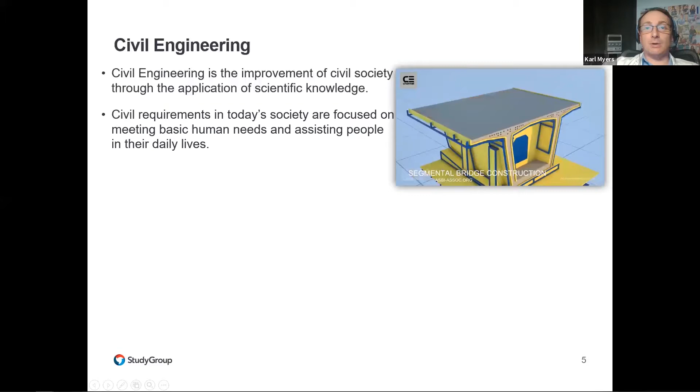As a civil engineer, you will focus on the improvements of civil society. For example, building new roads to connect remote villages, building new hospitals, railways, and bridges. The list of what a civil engineer does is truly endless. Essentially, civil engineers are focused on meeting basic human needs and assisting people in their daily lives. To do this, they need to understand the environment and how they can use it safely and intelligently to improve the population's quality of life.

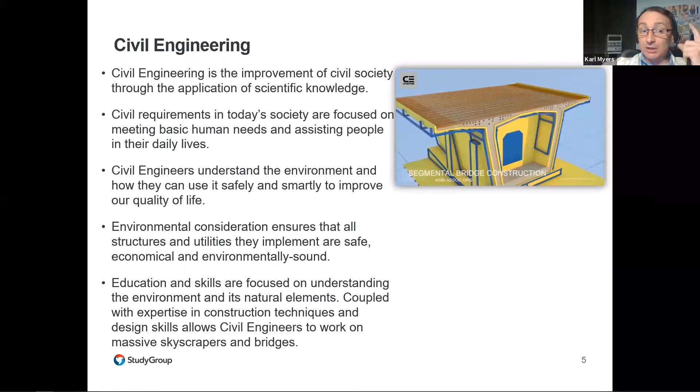Thus ensuring that all structures and utilities that they implement are safe, economical, and environmentally sound. As a civil engineer, you will be taught the skills focused on understanding the environment and natural elements, coupled with expertise in construction techniques and design skills. This allows civil engineers to work on massive skyscrapers, such as the huge civil engineering projects in Dubai.

So why should you choose to study civil engineering as an engineering discipline?

Employability. The world today is rapidly expanding, and with new initiatives in living and creating a more sustainable, environmentally friendly environment, civil engineering is experiencing a massive boom. Due to this, many countries are showing a skills shortage in civil engineering, and in many cases, all engineering disciplines.

So what do I mean by skills shortage? Essentially, there are not enough civil engineers for the jobs available. This means you have an excellent chance of finding a job in civil engineering right out of university, and in some cases, before you even leave university. This is the main reason why civil engineers enjoy one of the lowest unemployment rates of any profession, and civil engineering is one of the top paid professions.

This may not be your main reason to choose civil engineering. However, the main reason for working is to earn money to live. Starting salaries for civil engineers are amongst the highest for any university degree. It's the same with any engineering discipline, to be honest. It is one of the highest paid professions, being an engineer. In fact, the starting salary for a civil engineer, for example, is up to £29,000.

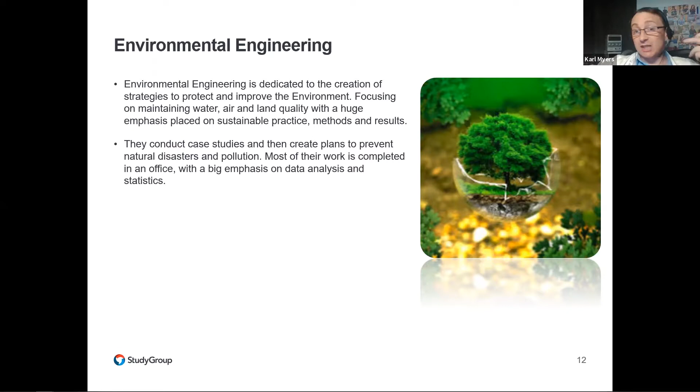They conduct case studies and then create plans to prevent natural disasters such as flooding or drought and pollution. Most of their work is completed in an office with a big emphasis on data analysis and statistics. In that regard, they're using a lot of artificial intelligence systems, mainly machine learning, for statistical analysis and predicting future trends, for flooding or drought, and also pollution.

Unlike other civil engineering disciplines, environmental engineers rarely use design and simulation software, which we'll be using today, but instead rely on data, statistics, and ethics to guide them. Due to the complex environmental laws that govern their every move, graduates of this discipline tend to have a better understanding of ethics and social problems than other civil engineering disciplines.

Environmental... sorry, I can't get my words out.

Environmental engineers are hugely in demand for government projects and by parks departments to implement strategies to deal with pollution, waste management, and noise levels, amongst many others. Some private companies also utilize the expertise of environmental engineers in their activities, if their activities have a potential adverse effect on the natural environment.

Consultancy work is another possibility, with many research positions opening up across universities and private companies as they ramp up their efforts to combat climate change. Environmental engineers implement strategies to deal with these problems, essentially.

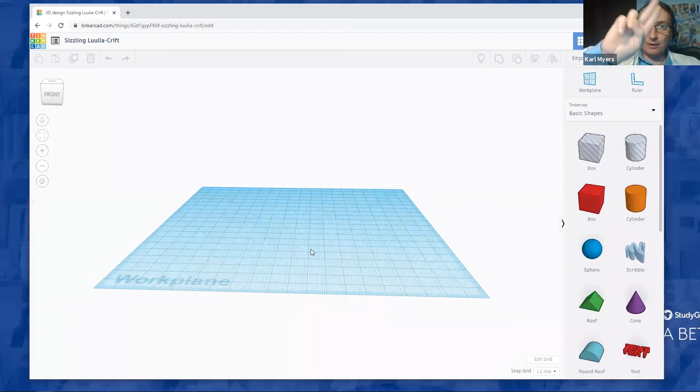If you're using a laptop trackpad, use your 2-finger gesture on the trackpad. Open your fingers to zoom in and close your fingers to zoom out. To move around the workspace, right click and hold, then move the mouse any way you'd like, and that will move you around the workspace. If using a laptop trackpad, right click on the trackpad, hold, and move around to move the work plane around.

Another way, which I will actually be asking you to do, is something called snap. If I ask you to snap front, you will see a little cube in the top left-hand corner. If I say snap front, just click on the front and it will snap to the front. If I say snap top, use the arrows on the side of the cube, and that will snap you to the left, right, top and bottom. We'll start from the top, just like that. Is everyone okay with that?

Professor, some students are asking for a code.

Okay, let me just log out. What you've tried to do, you've tried to actually access a class. We've not actually created a class in this, because I'd need to email everyone the class number. So let me just log out and I'll show you where to sign in. Just one second, I will log in now.

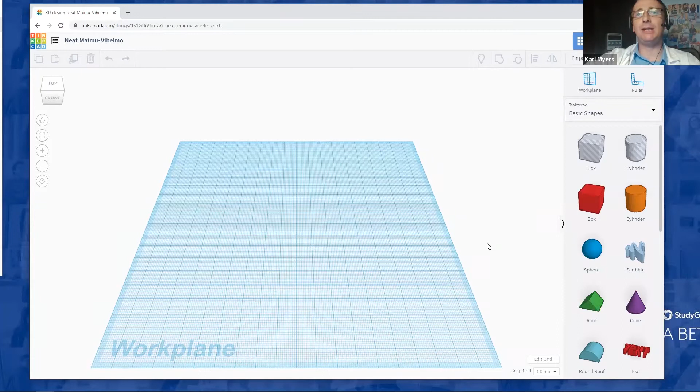You'll be faced with the design workspace, or 3D design work plane. To navigate this work plane, to zoom in using a mouse, scroll forward with your mouse wheel to zoom in, backwards to zoom out. To travel around the work plane itself, right click on your mouse, right click and hold, then move the mouse around to navigate around the work plane, just like that. You can also do this using the trackpad on your laptop.

So to zoom in, just open your fingers. To zoom out, close your fingers.

Another way of navigating the workspace: you will see a cube in the top left-hand corner. If I say snap front, just click the front of that cube and you will snap to the front of the design. If I say snap top, click the triangle at the top, or click on top, and that will snap you to the top. The same for all the others: left, right, and bottom.

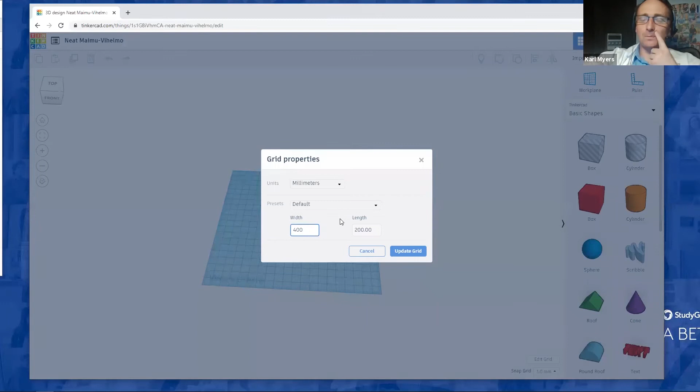Right, so the first thing we're going to do is set the scene. In the bottom right-hand corner of the work plane or design workspace, click edit grid. Then I would like you to change the width of the work plane to 400 millimeters, and also change the length to 40 millimeters, just like that. Then just click Update Grid, and you should be faced with the design or work plane just like what's on my screen now.

Another thing I would like you to do - you'll see just underneath Edit Grid, it's called Snap Grid. I would like you to change that to 0.1 millimeters, please. There you go, just like that.

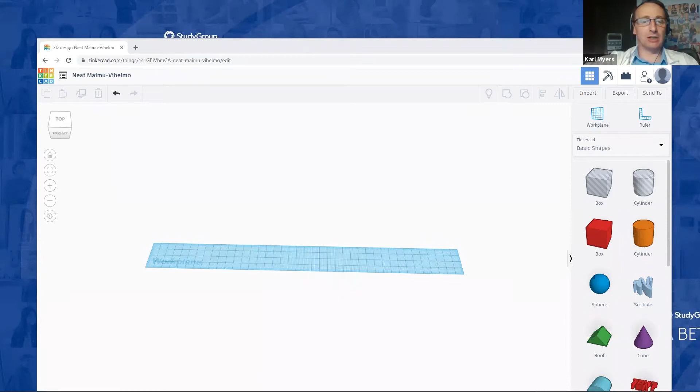Again, we'll take this nice and slow because it's really, really tricky, just to get it. You will see - I won't explain it now because you may not understand, but you will see.

Yes professor, I have some yeses here, so I think you can go forward. Let's do it. Okay, so the first thing that we're going to do, we're going to set the scene.

We're going to add the banks of the river. On the right hand side, you will notice that when we're actually building something using Tinkercad, all that we use is basically basic shapes - boxes, cylinders, spheres, and prisms, and so on and so forth. This is the same as another piece of software brought by Autodesk called Autodesk Inventor.

Essentially with Inventor, you can actually just build things out of shapes. So you will see in the shape or component search bar on the right hand side, you will see the box, the red box. If you just click on that and drag one over to the left hand side of your work plane...

And you will see, I'll zoom in for you. Let me just spin that around so you can see it. Let me zoom out so you can see it. You will see when you create that block, white squares all the way around it.

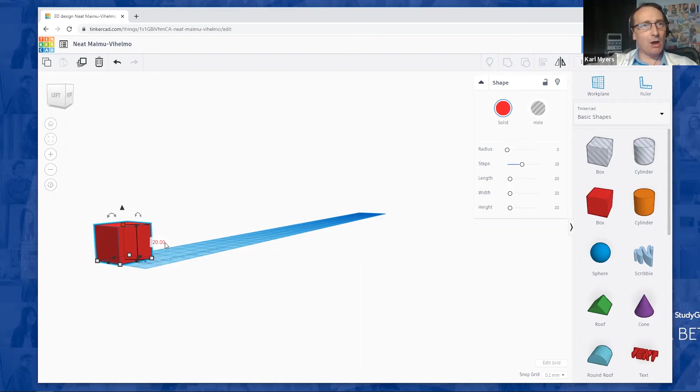With these white squares, you're able to click on the white square and then change the dimensions or sizes of the block. So the first thing we're going to do is change the height of the block, to 30 millimeters. If you click the top white box, you will change that to 30 millimeters. This is because the bridge is going to be suspended 3 meters above the river.

The next thing you're going to do is change the width of the block, to 40 millimeters, just like that. And then the length of the block is going to be 50 millimeters, just like that.

Once you've done that, move around the work plane and make sure the box is actually on the work plane, because if you don't create it just like that, looking from that orientation it looks like the box is on the work plane, but if you look from underneath, you can see that it's not. Can I have a show of hands when you've completed that step, please?

Also, if you click on that box, we're going to change the color of that to green, essentially because it's the bank of the river.

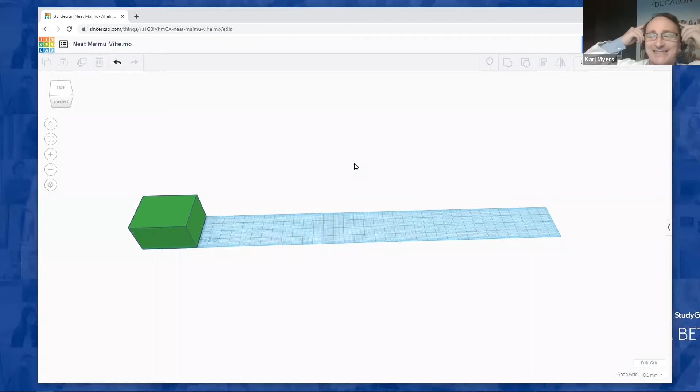Is this from Autodesk, Professor? Yeah, Tinkercad, Autodesk, it is. You will be very familiar with this. I think the one I'm more familiar with is just the 2D designs, and then we extrude them to make it 3D, so it took me a while to get used to the 3D software again, since it can be really fiddly. I don't know how to use ArchiCAD, it's so annoying, I prefer Revit. That's the problem with this software, brought by Autodesk - it can be quite fiddly. But it's really handy, for example for simulating - you can't simulate in this software, but you can using Inventor. You can pull out hotspots, areas where there's going to be the majority of damage. So it's a really good bit of kit, actually.

It's a challenge. Professor, can you repeat the step to change the block color, please? Of course. Click on the block itself, and in the right-hand corner the shape options will be displayed. Click off the block, click on it again, then click on solid where it says solid, and change the color to green.

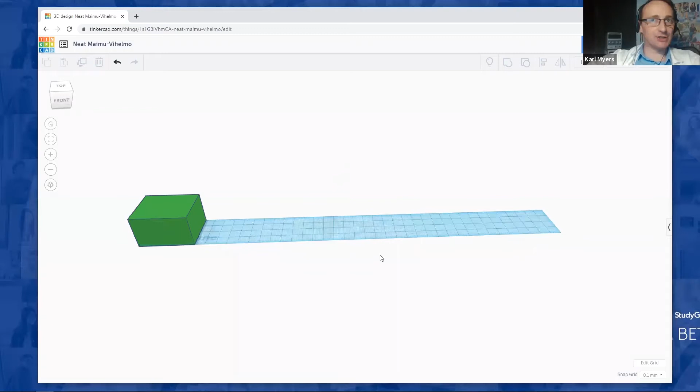I'll show you a little trick now. When using software like this, you don't have to keep creating the same thing - you can use something called duplicate. Essentially it just copies it and you drag it to wherever you need it. I'll show you that now. This will become evident why it's useful when we start creating the trusses for the bridge.

I think we can go, Professor. Let's do it, let's go. The next step, you've created the left-hand bank of the river, so now we're going to create the right-hand side. Snap top, just like that, then click on the block itself, the bank you've already created. Then on the top right-hand corner, let me try and straighten this block up a bit.

Okay, so if you click on the block, in the top left-hand corner next to the garbage bin or dustbin, whatever you want to call it, right next door to that is a button called duplicate and repeat. If we click that, it creates a duplicate of that block inside the previous block.

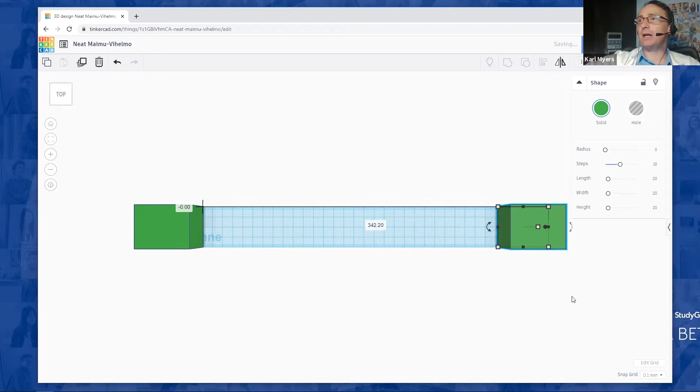So if we just left-click and hold, and then drag the duplicated block to the opposite end of the work plane, just like that. Then move around to make sure that the block is actually at the end of the work plane.

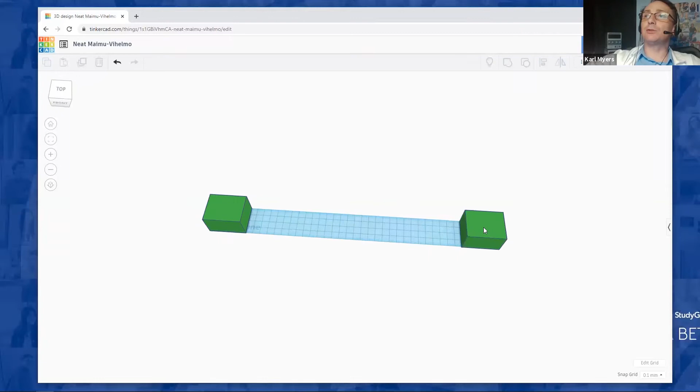So this is another thing as well - sorry, I should have mentioned this earlier. If you make a mistake or you just want to remove a block, or you've duplicated something twice, if you just click on the block itself and then click delete, it will remove the block.

So the last step, if we've just created the left-hand bank, if we click on the left-hand block, just in the top left-hand corner you will see a dustbin or garbage bin, whatever you'd like to call it. Right next door to that, on the left-hand side, you'll see another button called duplicate and repeat. If you click duplicate and repeat, that creates a block inside of the block you duplicated.

So if you just left click and hold on that block, you'll then be able to drag a new block over to the other end, or the opposite end, of the work plane. And again, just swivel around the work plane itself to make sure the block is actually completely on the work plane.

As you can see, mine isn't. So if you just click on it, left click and hold, you can then move that block wherever you need to. And that is the problem you're going to have all the way through this - making sure the blocks are in the right place.

To duplicate blocks, say for instance you've made a square out of blocks, to duplicate that whole block, you've got to make that whole thing a block in itself. And if the blocks aren't touching, it will not group the blocks. But we'll talk about that a little bit further later on.

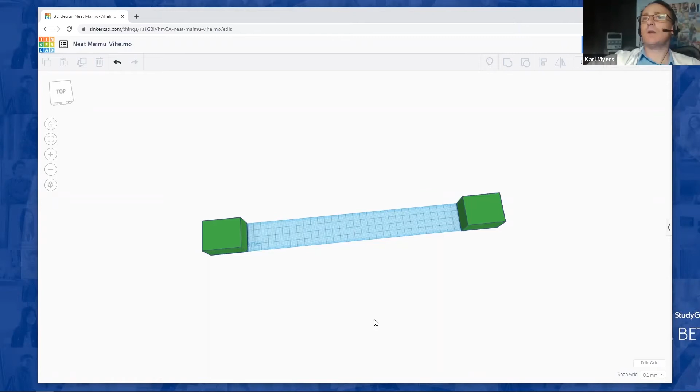Okay, how are we all doing? Everyone okay? Okay, Professor. Brilliant, excellent.

And this is really fiddly at the moment when you're just learning it, but believe me, I will show you at the end what other students have actually created with this. They never stopped with bridges - they've actually designed full cities or a little cityscape within it. So it's really, really good software.

Okay, again, just let me know when you would like to continue.

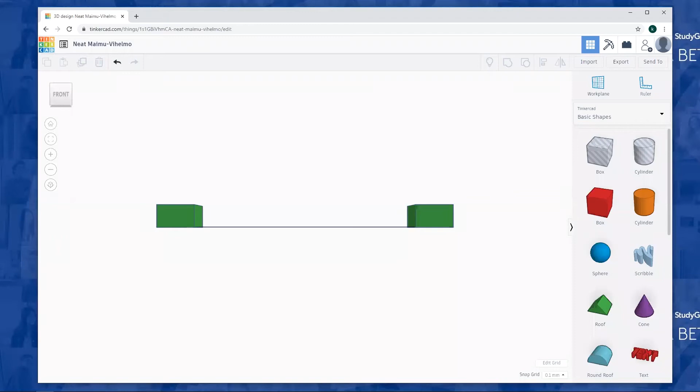Okay, so we've got loads of hands now, loads of hands. Yes, I think we can go.

Yeah, let's do it. Okay, so the next thing that we're going to do is create a new work plane. And what I mean by this is where we've just built the actual riverbanks - so the work plane for that is essentially the river. So we need to create a new work plane on top of the banks of the river, essentially where we're going to build the bridge.

So again, in the component search bar, or the shape search bar if you'd like, you will see just at the top of it where it actually says work plane. It may not say work plane - well, obviously it will say work plane, but it'll be in there in Portuguese, I think.

Okay, I know we had issues with this last time. So if we just click work plane, and then move this over, you'll see a white square following your mouse cursor. Drop that on top of the left-hand bank, and just click to drop it. As you can see, it creates a new work plane on top of the bank. This is where we're going to start building the bridge.

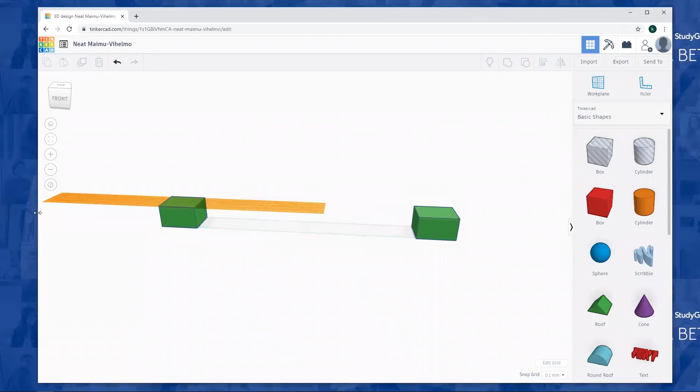Sorry, Professor, when you're ready. No, totally excellent, no problem at all. Just take your time, there's no rush. I would prefer it if you all basically got to finish the bridge rather than rush.

So the next thing we're going to do, just snap front. When I say snap front, click on the cube in the top left-hand corner, and click on front, or whatever it is in Portuguese. I don't speak Portuguese, unfortunately.

Okay, so now we're going to create a vertical strut. Sorry, one second, I've got the wrong PDF. So here we go, I've made a mistake there. Just one second. There we go, okay, so now I'm using the right one.

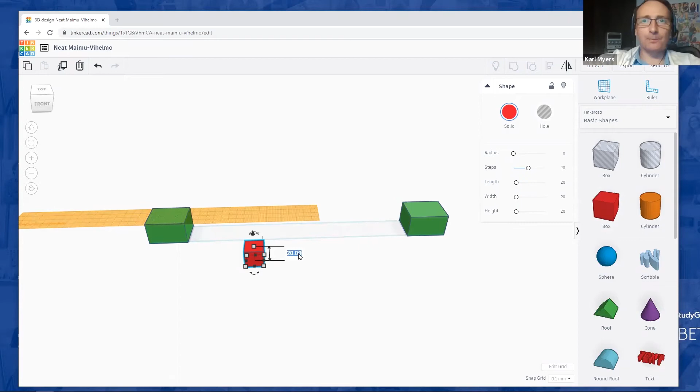So to do this, again we're going to use our friend the block or the box. Click on that, and drag it over to our work plane, just move it away from the work plane, like that. Then we're going to change the dimensions of this block: the height is going to be 1 millimeter, the width is going to be 1 millimeter, and its length is going to be 75 millimeters. If I zoom in on that, it should look something along these lines.

And we're going to leave that color as red, okay? We're going to pretend that the bridge is painted red.

If you would like me to repeat those dimensions: we've got a height of 1 millimeter, a width of 1 millimeter, and a length, excuse me, of 75 millimeters. Again, just let me know when you're ready to continue.

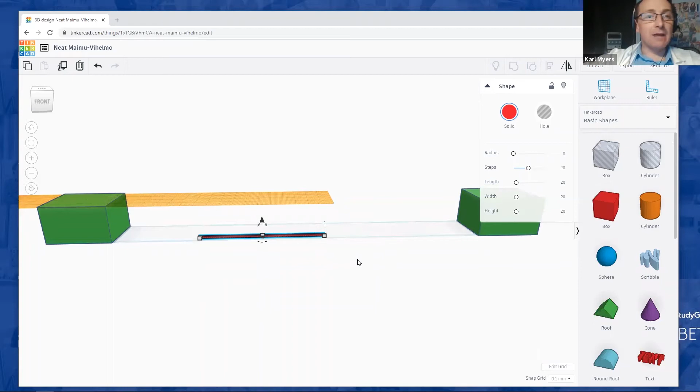Also, a little bit of an intro. If you have a look at the PDF, it talks a little bit at the beginning about why trusses or truss bridges are so popular, and it actually moves into the realms of how they dissipate loads, and why they are so strong. It's an interesting read if you'd like to have a look at it. Well, I think it's an interesting read anyway.

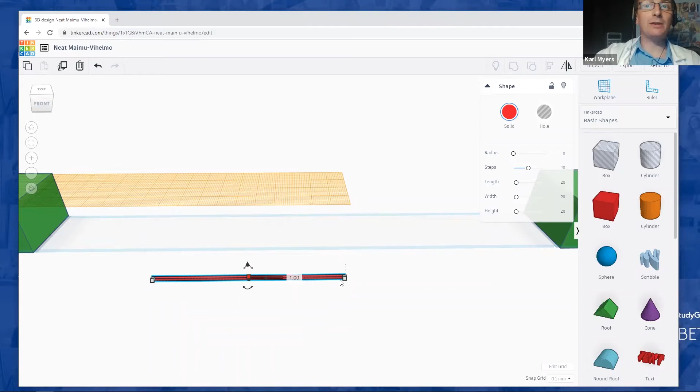Sorry, Professor, can you repeat the measurements, please? Yeah, sure. Okay, the height is 1 millimeter, the width is 1 millimeter, and the length is 75 millimeters.

Okay, are we all doing okay? Yeah, we have loads of hands. Professor, let's go.

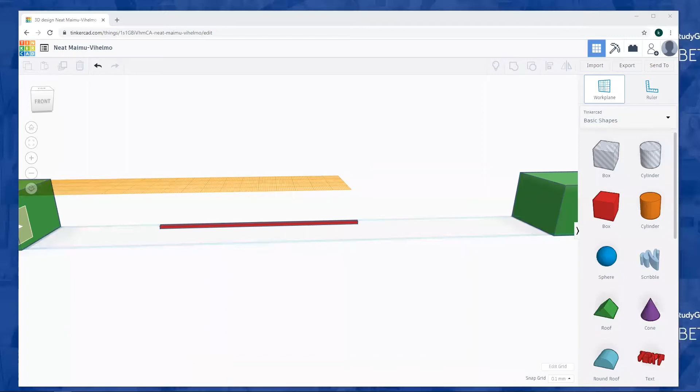Okay, so the next thing you're going to do, we're going to add a new work plane again. This is the beginning of the truss, so this is essentially a quarter, or an eighth if you want to look at it, because you've got two sides. It's an eighth of the bridge we're going to create now.

So if you click on work plane, which is at the top of the component search bar, we're going to create a new work plane on top of the stringer we've just created, just like that.

Once we've done that, we're going to build now a vertical strut. So to do that, if we just click on the box, our friend the block box again, and we move that box just on top of the stringer we've just created.

What we're going to do now, we're going to change the dimensions of this again. We're going to change its length to 1 millimeter, its width to 1 millimeter, and its height—so the height of the bridge is 6 meters—we're going to change that to 60 millimeters.

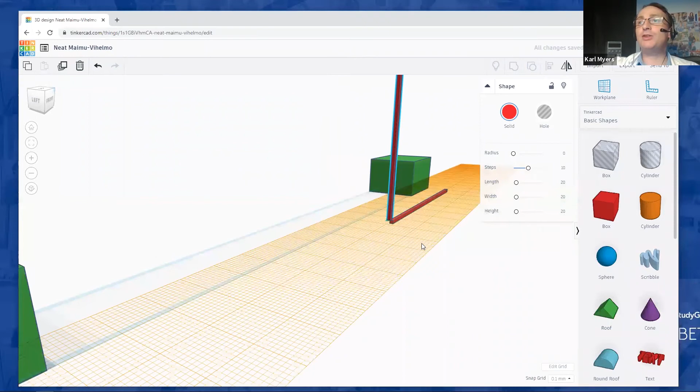Once you've done that, move around your workspace just to make sure that the two parts are touching. As you can see with mine, they're not. So click and just move it over to the end of the stringer we created, and again just look from all angles to make sure.

This is the very, very tricky part, because you can look at it from one angle and it'll be okay, and you'll look at it from the next and it will be nowhere near it. There we go, just like that.

And you should be left with something along them lines. So what's going on my screen?

Professor, yes, can you repeat please the last step? Yes, of course I can. Okay, so what I'll do, thank you—just, yeah, no problem at all.

I'll just get rid of that one. So what we're going to do, we've created—let me just move that back and then I'll start from that side.

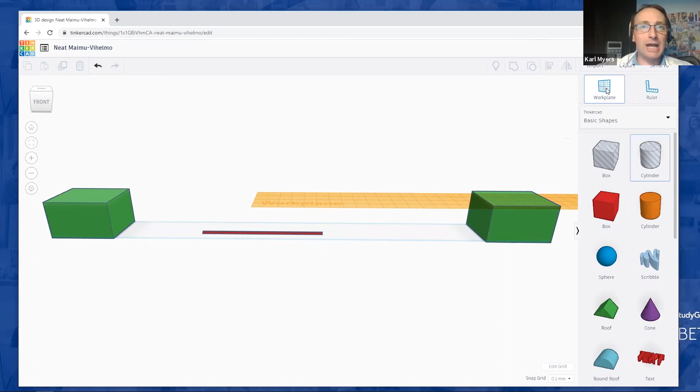So what we're going to do, we're going to create a new work plane on top of the horizontal stringer. If we click on work plane, which is on the top right hand of the component search bar, and then we're going to create a new work plane just on top of that stringer, just like that.

So you should be faced with something along them lines, if you look at my screen. Then what we're going to do, we're going to create the vertical strut for that.

Again, using our friend the box on the right hand side, if we just click on the box and then we drag that just on top of the stringer we've just created.

We're then going to change the height of the vertical strut to 60 millimeters, change the width to 1 millimeter, and then the length to 1 millimeter also, just like that.

Once we've done that, if we just move around the work plane, as you can see, if I look at it from the front it looks like it's actually connected, but it's not. If we move around the work plane you will see that they are miles apart. So if we zoom in slightly and keep moving around so you can actually see it.

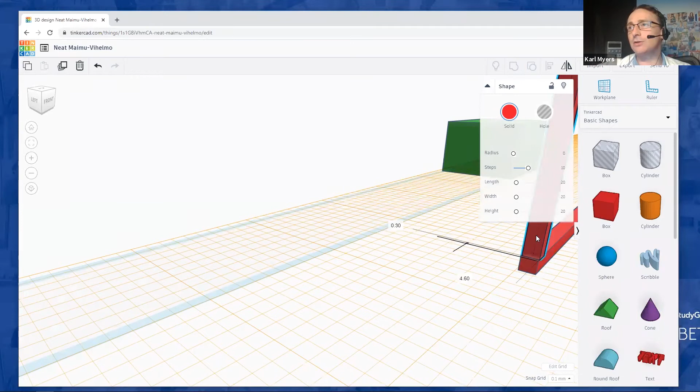Then what we'll do, we just click on that block, left click and hold, and then we can drag that block just onto the stringer, just like that. Again, just move around the work plane to make sure that it's touching all the way around. Okay, just like that.

Again, show of hands when we're okay with that. Thank you, or thank you, no problem at all. Or if you don't want to show your hands, just say yes. It's no big deal, okay, whatever you want.

So we've got a few hands up now.

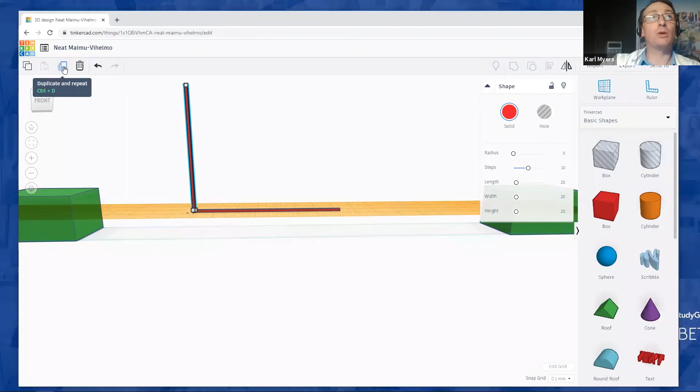Right, so the next thing that we're going to do, we're just going to duplicate the block that we've just created to form the vertical strut for the right hand side. So again, if we just click on that block, we'll click duplicate again, which is at the top left hand side of the screen next to the trash can or rubbish bin, whatever you call it. You just click on duplicate, click on the block and drag it over to the opposite side, just like that. And again, just move around the work plane to make sure that it's actually touching and it's right on the edge. Just zoom in.

And I can't believe it, I got it right first time. Oh no, I didn't. Just like that. Okay, and again just show your hands when you've completed that step, please. Oh, did I drop the hands on the last one?

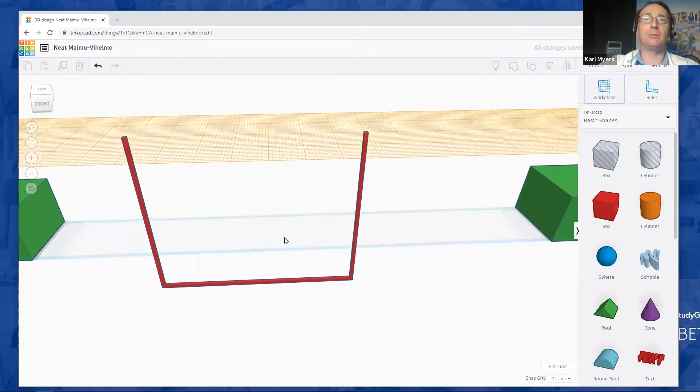Right, so move the yellow work plane. So when you're creating a new work plane, on the component search bar on the right hand side, you will see just a work plane button next to the ruler. If you click on that work plane, you'll see a little white box or a little blue box. To create the work plane, you just basically move that box over on top of where you're going to be building. So if I just click on top of that now, the work plane will be created. Again, to create a work plane, if we just click on the work plane and I'll move it on top of the vertical struts - you don't need to do this, I'm just going to demonstrate how to do it. So you just go over on top of it, move that box on top of it and click just like that, and that will create the work plane. So I'm going to move that back down here because that's where we're going to be working.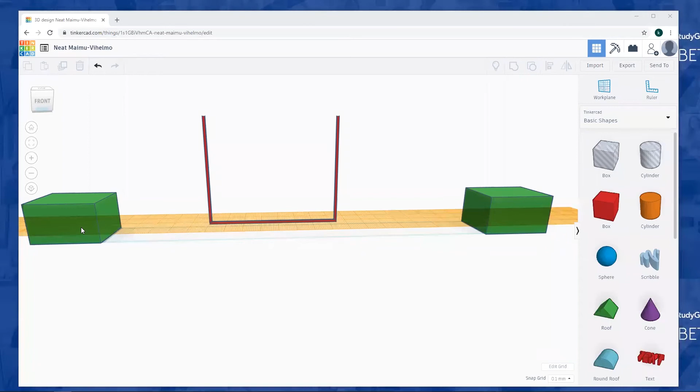A little bit complicated, but what we're going to do, if we just move that work plane - we click on the work plane again, move the work plane just on top of the bank block on the left hand side, so we just click there and then we've created the work plane on that block. The next thing we're going to do, we're going to use our friend duplicate again. So if we click on the horizontal stringer at the bottom, click duplicate on the top left hand side again, just by the trash can or the rubbish bin, whatever you call it. Click on that and you'll see, once you've created or highlighted the block, you will see a black triangle above a curved arrow.

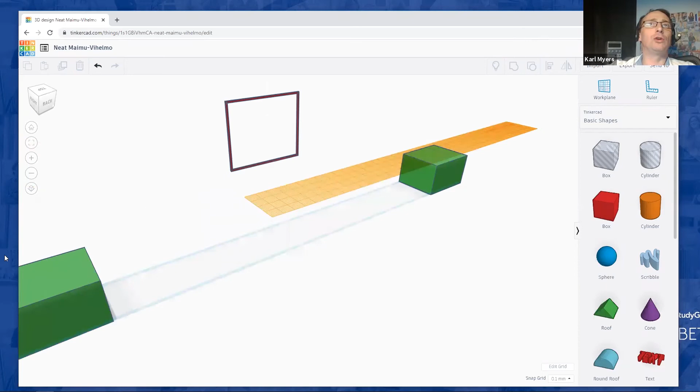Okay, just left click and hold, and move that up to the top of the vertical struts and release. Okay, and just like that. Again, move around your work plane just to make sure that each one of them blocks are touching. Okay, this is probably the most complicated part of it.

Okay, I guarantee you after this bit we'll fly. It'll just flow from here, because essentially all we're going to be doing from here is using our friend duplicate.

Again, just say yes when you've all completed that. Or if you've got any issues, any questions, just let me know.

You can move the yellow work plane. So to move the yellow work plane, on the top right-hand corner of the component search bar, you will see work plane. All you do is just click on that work plane. Then once you've clicked on it, you will see when you move your mouse cursor, a little blue box with a triangle in the middle of it. To move the work plane, all you do is put that box where you're going to be working, or on top of what you're going to be working, and then just left click to drop it, and that moves the work plane or changes the work plane.

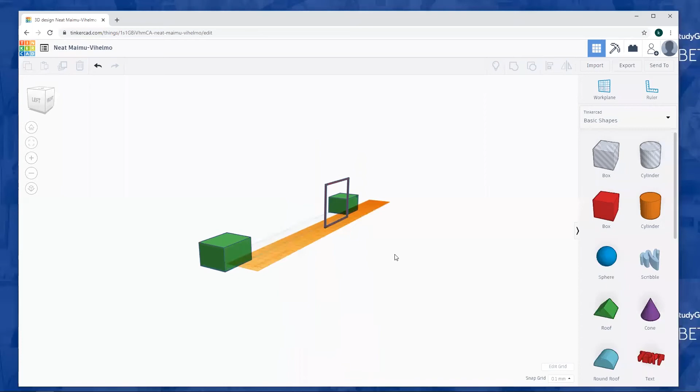Okay, so I'll just repeat that step. I'll move the work plane back away from it. So what we need to do now, we need to create a work plane just on top of the horizontal stringer again, because we're going to be building on top of that. So if we go to the work plane tool on the right hand side in the component search bar, just at the top, we click on that, and then we'll move that work plane just on top of the horizontal stringer at the bottom, just like that.

Okay, and then what we're going to do is now create the diagonal member, which will basically go from corner to corner. So to create that, we first need to use our friend the box again. If we click on that, we move it over to the work plane. You can just move it away from the actual work piece for now. We're going to change the height of this to 50 millimeters, then change the length to 1 millimeter and the width to 1 millimeter, just like that.

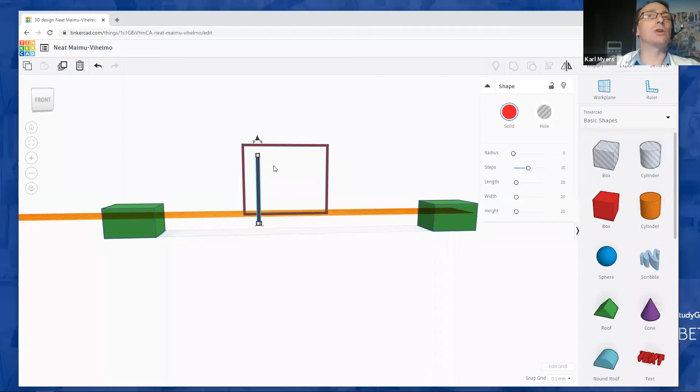Once you've completed that, changed the orientation and everything, what we're now going to do is tilt this member on a 45-degree angle. To do that, when you've highlighted the new block, you'll see just above it the curved arrows and the triangle. If you move your cursor just over those curved arrows, a compass, or protractor, will appear on the screen. We just click on that, and then click on the box just above it, which says 0 degrees. If we type in minus 45, that's minus 45 degrees, which will tilt it to the right, just like that.

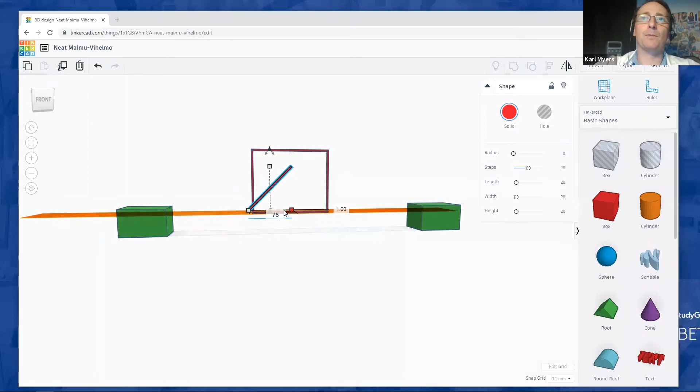And then what we're going to do, if we click on that box again, the block we've just created, we're now going to change the dimensions of the block again. We're going to change the dimensions to 75 in length. So the white box just at the bottom, we're going to change that to 75. And the height, we're going to change to 60, just like that.

You will notice when you actually move it onto the work plane, it's too high now because we've tilted it. So to drop it down, that's the black triangle just above the curved arrows again. If we click and hold on that, left click and hold, we just drop it down so it meets the bottom corner of the square. And again, zoom in just to make sure that it's touching all the way around. Just like that. And again, if we look at the top, just make sure it's all touching all the way around.

Let me just zoom into that a little bit more so we can see it.

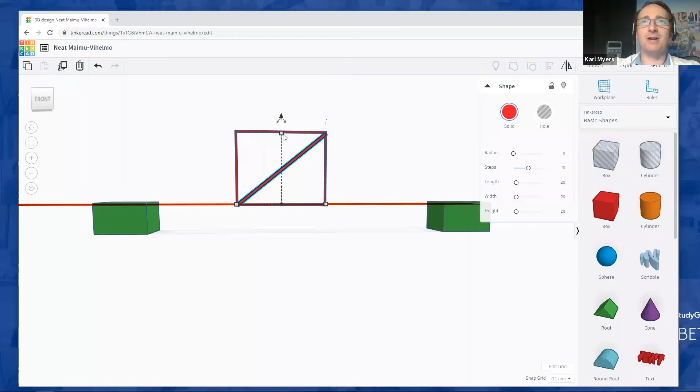Right, I promise you, this is the hardest part, okay? I promise. Just getting this bit right is the hardest part. Again, just let me know when you're ready to continue.

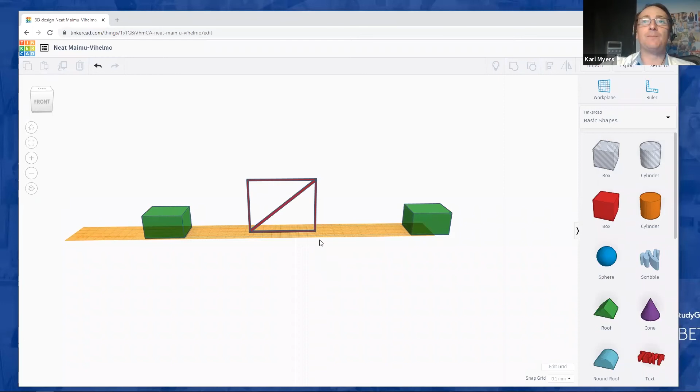Once you tilt it, tilt it to the right. I'll repeat the step on how to actually tilt it. If we click on the block just like that, you'll see a curved arrow at the top. If you click on that, and then in the box at the top which indicates what angle it's on, type in minus 45 degrees.

Once that is completed, you will see the dimensions have changed slightly. So the height of that, once it's been tilted, needs to be 60 millimeters, and the length needs to be 75 millimeters.

Then just move it over into the center of the square we've just created. Again, just move around the work plane, or the workspace I should say, and make sure it's touching in all corners. It's very, very important that it's touching everywhere. You'll see why in a moment.

Again, this is not easy, okay. This is not an easy tutorial, this. It will take you time to get there.

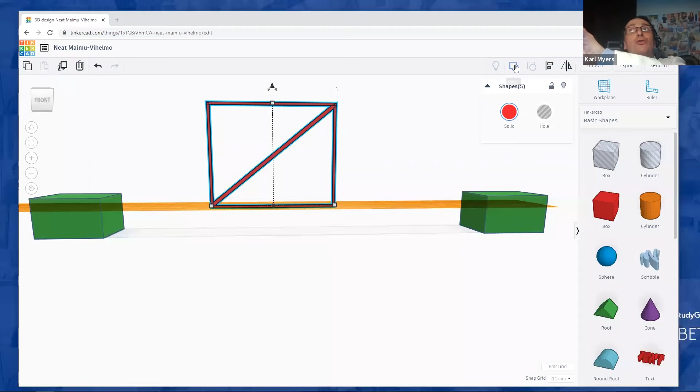And just above, you will see a shapes box be created. Just in the top right, or just above that, you will see a button next to a light bulb called group. If you just click group, that's going to group all of them pieces together. So that now, as you can see, I'm moving it around, is just one piece in itself.

And then after that, all we're going to do is use our friend duplicate again. So if we click and highlight what we just grouped together, click duplicate, which is at the top left hand corner, next door to the trash can or rubbish bin again. If you click on that, and then we're going to drag another one eighth of the bridge just next to it there, like that. Just pull it forward slightly, because we're going to perform some sort of action on this now to make it the opposite way round. Again, just tell me when you're ready to continue.

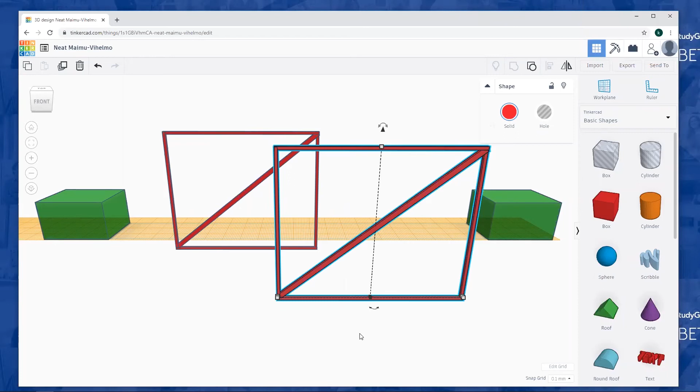Yes, you're right, it's not, it really isn't easy, I am challenging you here. But they're doing great, oh yes, they're doing really well, really well. I'll be honest with you, because I haven't used 3D design software for a very, very long time, it took me a day or so just to refamiliarize myself with this software. So I understand that it really isn't easy, there's no rush.

No rush whatsoever. Sorry Professor, Gabriel Botcher, he said he couldn't complete the last step. Okay, which the last step where we duplicated or grouped the box, which step was it?

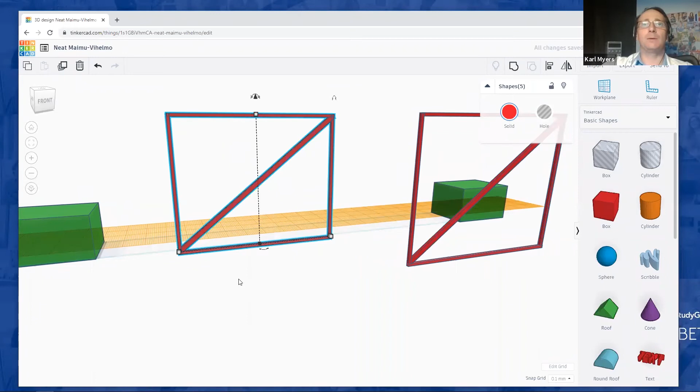So to create the diagonal, the work plane must be on top of the horizontal stringer. Work plane is just at the top right-hand side of the component search box. If we click on that, we create a new work plane on top.

I'm going to answer that question now. Oh, I've made a mistake there. So we're going to create the work plane, but we're going to actually put it on top of the vertical stringer, just like that. Sorry, the horizontal stringer, just like that.

To create the actual diagonal block, if we just click on the box on the right-hand side and drag that over on top of the horizontal stringer. We'll change the height to 50 millimeters, the length to 1 millimeter, and the width to 1 millimeter, just like that.

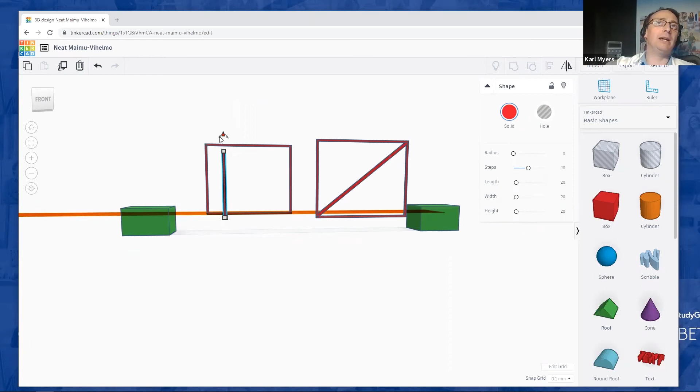I'm going to move that towards me slightly. Then what we're going to do is tilt this diagonal member to a 45-degree angle. If you see the curved arrow just above the block, we click on that and change it to minus 45 degrees, which will tilt it to the right, just like that.

We're then going to move that diagonal block over to the square we created, and drop it down so it meets the horizontal stringer. To drop it down, you'll see a black triangle above the curved arrows. If we left click on that and drop it down so it meets the bottom of the square we created, then zoom in to make sure the diagonal block is right on our workpiece, just like that.

We'll move it across again to make sure it's actually there, just like that. Once we've got to that point, if we change the length of this to 75 millimeters and then the height to 60 millimeters, just like that, make sure it's touching all the way around. That needs to be raised up just ever so slightly, just like that.

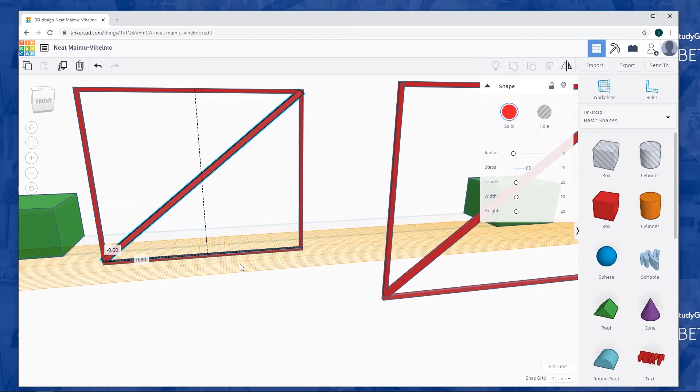Just like that. And again, just move around the work plane to make sure that it's actually in the position that you would like it.

I mean, don't be too careful about it, okay? As long as it's touching, just don't be too careful about it. Because if you don't, like me, I've got to make it perfect. It's just one of those things. That's what happens when you become an engineer, you become a little bit OCD about these things. About everything, actually.

Once you've actually completed that, once you put the diagonal stringer in, just draw a box or drag a box around it. To do that, move yourself away from the workpiece, left click and hold, then just drag it around the workpiece we've just created, and then we click group.

For some reason it's saying it's already grouped when it's not. Oh yeah, it is, there we go. Then we group that, and we're going to duplicate that group, drag it to the side, and we'll create this one.

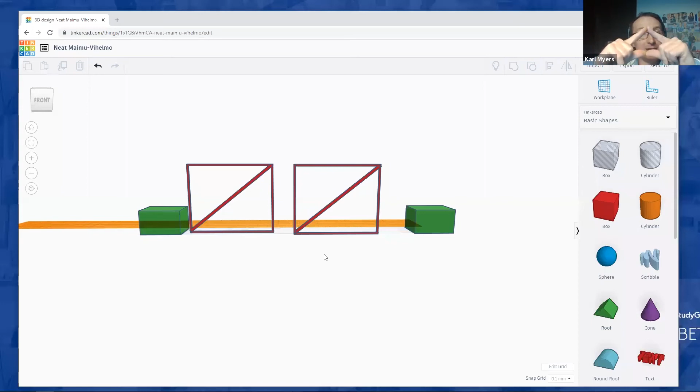Would it be stronger if we did the other diagonal stringer but on the other side? Yes, it would. Because if you remember from the very beginning, a truss is an arrangement of triangles, and the reason we use triangles is because they are immensely strong, just because of the way they dissipate the load. That could be either compressive loads or tensile loads - compressive, push together, tensile, pulling apart.

So is everyone okay up to this point now? Are we all okay?

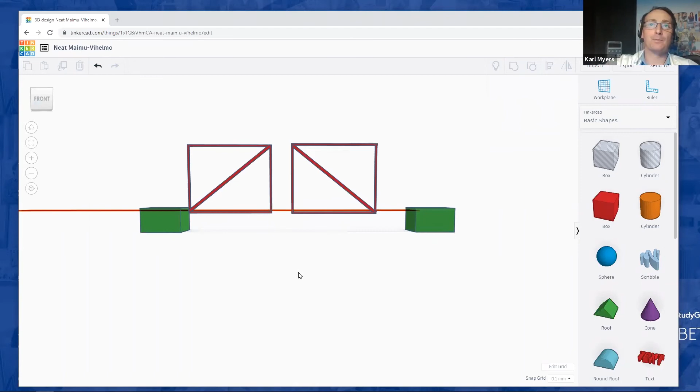Then, when we finish that bit, we've got to move that piece just to meet the other one, just like that. And again, if we move around the work plane, just to make sure that it's touching all the way around, and we're okay.

The next thing we're going to do, after moving that into position, is draw a box or drag a box around the pieces you've just created, and then we'll group them, so we make them one piece in themselves, using the group button next to the light bulb on the top right-hand side. You click group.

And then we're going to duplicate the block that we've just created, using the button next to the trash can, and then drag that to the side, just like that.

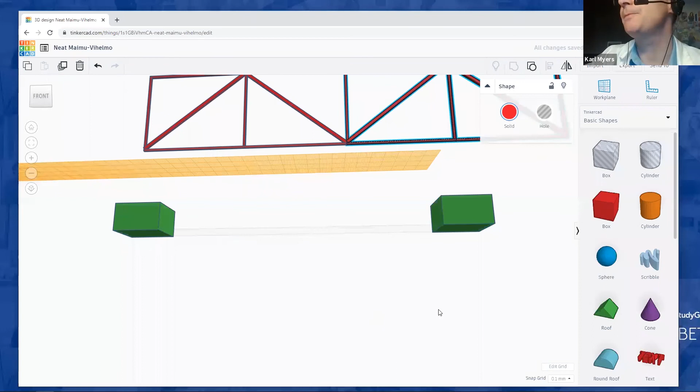And again, we're going to move it to meet the side we've already created, just like that. And again, just move around, make sure you're all in the right position, make sure it's touching all the way around.

Then we're going to repeat that step, and if you look at it from the back now, we're going to drag a box all the way around those two pieces, and group them together. You've formed now one truss, one side of the bridge.

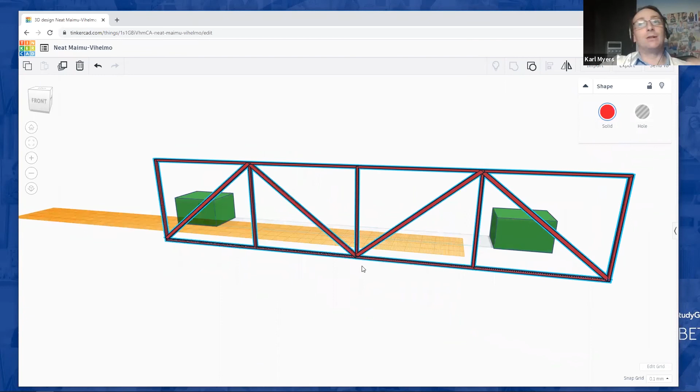So as I've just said, we've now created one side of the truss. So how do you think we're now going to create the other side of the truss? Shall we make it from the beginning, just like we've made this one, or do you think there's an easier way of doing that?

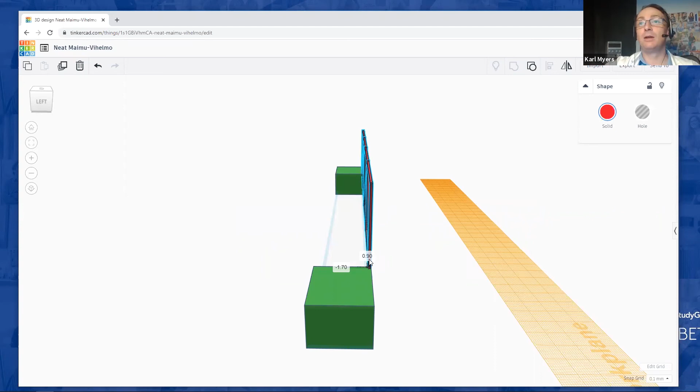So what we're going to do, first of all, is move this whole piece over on top of the banks. Again, if we just move around the work plane to make sure that the bridge is actually sitting on top of the banks, because we can't have it hovering in the air, because that wouldn't work.

As you can see, this block's just slightly out the way, so we just move that in. Again, just make sure it's touching on all sides. Just move that bank just to meet it, okay, just like that.

Okay, so it's touching all the way around, just like that. What I'll do, I'll get rid of that work plane now because it's in the way. You don't need to do this, it's just so I can actually demonstrate it. Okay, so now what we're going to do, we're going to duplicate this whole block.

So we click on that, and then we click duplicate. And then what we're going to do, we're just going to drag the second half of the bridge just to the other side of the bank, just like that. Okay, and again, just make sure it's touching all the way around. This is massively important, that it's touching all the way around, just to make sure that when we're actually grouping the blocks together, it actually groups the blocks together.

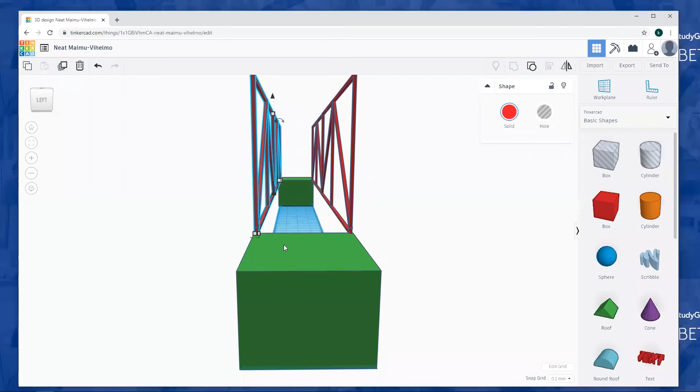And also, if you do have access to 3D printers - I know I haven't at the minute, but a lot of people who do have access to these now - if it's not touching, you will not be able to print it, okay? So if you can let me know when you've completed that step, please, just by saying yes.

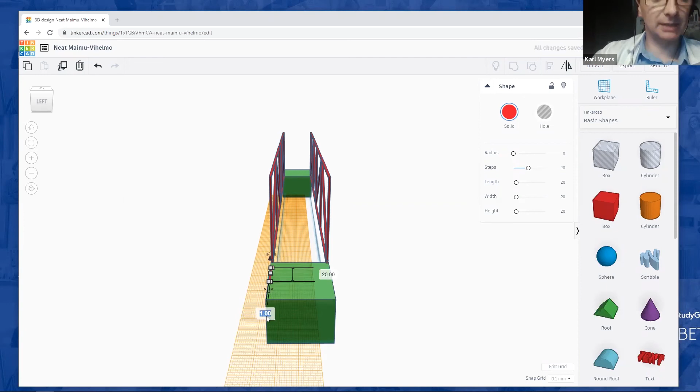We'll click on that box and drag it over onto the bank. We're going to change the dimensions of these to 1 millimeter in height, 40 millimeters in length, and then 1 millimeter in width. And then we'll change that block color to black, just because it's a floor beam.

Once you've formed that block, we're going to move it so it meets the edge of the two trusses. If I zoom in, and drag it back slightly so it's right on the very edge of the two trusses and doesn't cross them. Don't worry, it doesn't need to be perfect - you can get that perfect when you're completing it on your own.

That was a pretty simple step. All we're going to do now is duplicate this block 3 times. So if we click on that block, we'll duplicate again, and drag this next block to the opposite end. We move around the work plane again, and move that block onto the edge of the two trusses. Make sure it's touching all the way around.

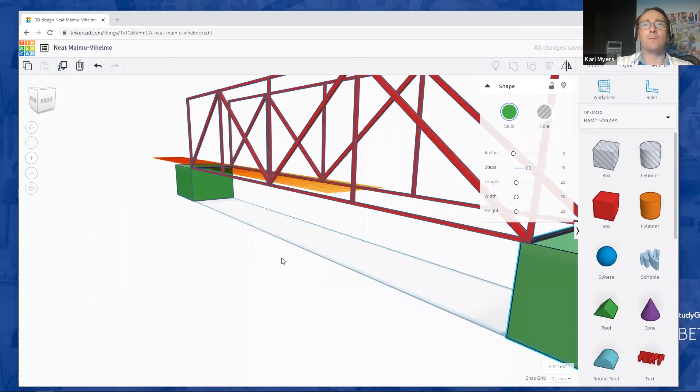The third and final floor beam we're going to put at the center, where the two triangles meet on each truss. So we duplicate that one, and drag it to the center. Again, just move around the work plane to make sure it's actually in the right place and touching all the way around. We've got one more block after this to create, and then that's the bridge finished.

Obviously, a bridge would have more than 3 floor beams - you can add them later on. Essentially, the floor beams would meet at every one of these vertical struts, and you would have a floor beam there. But we're not going to do that because we're running out of time a little bit. Is everyone okay with that? Just let me know when you're ready to continue.

As you can see, it's now starting to resemble a bridge. It's now starting to look like a bridge.

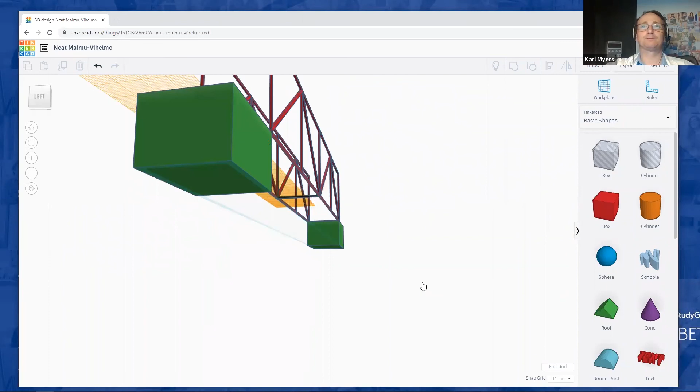Is anyone going to... sorry, I have a question here. How do you call this bridge, this type of bridge? It's called a truss bridge.

If you have a look at this side here, this is a truss in itself. And if you actually move into the world of civil engineering, you will see trusses everywhere. Essentially because, as I explained earlier, there's a massive trade-off between strength and weight. The reason you see these everywhere in engineering is because there's immense strength in the arrangement of a triangle like this, and it's very, very light. So that's why we use trusses.

Some of you will already have seen trusses in roofs - in a roof, you will see roof trusses, again used because they dissipate loads really well. For instance, roof tile adds a lot of weight to a roof. You will also see them in the likes of floor beams like these, or joists as we call them here. You'll see them used in that arrangement essentially because they are so light and so strong.

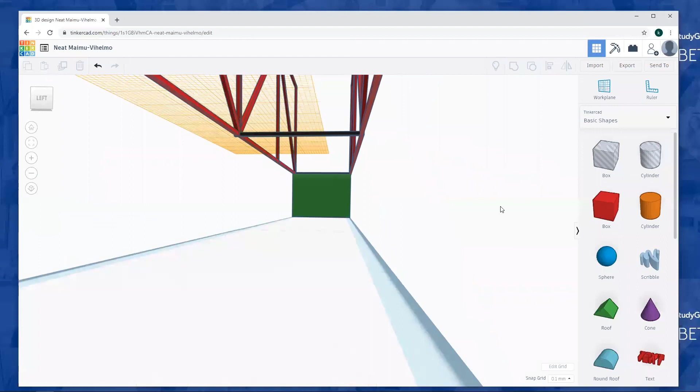Oh, yes. Okay. Yes, of course.

Okay, this is the last block before we've completed it. Now we're going to add the deck. Obviously no one will be able to walk or drive across the bridge because there's nothing to drive on - you'd go straight into the river. So we're just going to create the road or deck of the bridge now, using our friend the box again.

But before we do that, we're going to move the work plane. If we click on the work plane tool on the top right hand side of the component search bar, we're going to move that on top of one of the floor beams, just like that. Then if we get our box, we'll drag that over just on top of the floor beam, on the work plane.

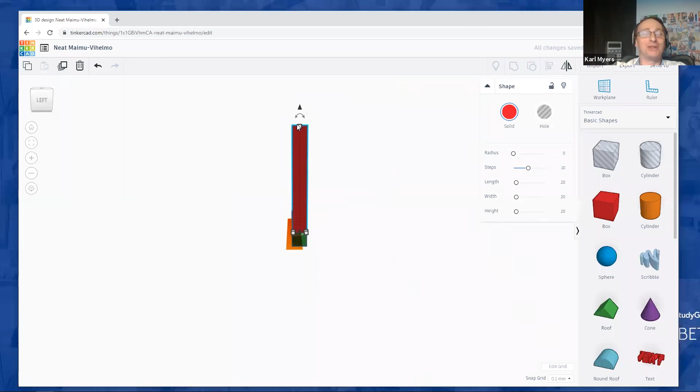Now we're going to change the dimensions of this block. We're going to change it to a height of 1 millimeter, change the width to 38 millimeters, and change the length to 300 millimeters. Oh no, I've done that wrong - I changed the height to 300 millimeters. We want the height at 1 millimeter, and the length at 300 millimeters.

Then we'll drag that into position so it's in the center of the two trusses, just touching them. Move around the work plane, have a little look around, make sure it's touching everywhere. Then we're going to change the color of that to gray because it's the road, and in general we use tarmac or something along those lines. Then we'll move the work plane back to the bottom, and there we go - we've created our bridge.

We've designed our first truss bridge in Tinkercad, and this is essentially how you would design anything in civil engineering - whether that's a skyscraper, a house, a bridge, a road, anything along those lines. They will all be designed in this software.

Did everyone manage to follow on? I know it wasn't easy, this one. Really wasn't easy. I would like any input on whether I should simplify it for the future, or is everyone okay?

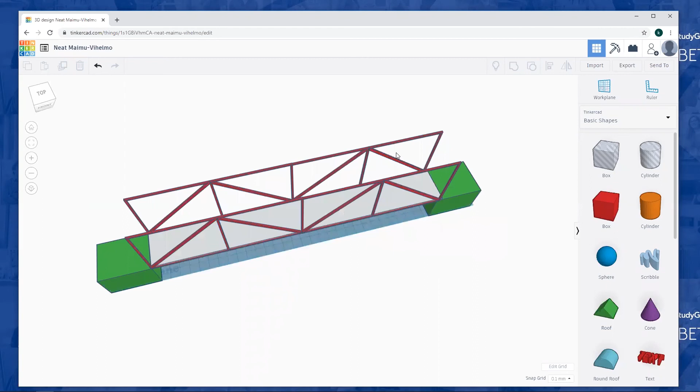Okay teacher, excellent, brilliant. So while you're all completing that, I've just got something to show you - this is something a student has actually created, a little city.

Let me just find it. It's obviously disappeared from my view, which is good, isn't it? Right, let me just log in again. I'll sign out and log back in because it shouldn't have disappeared.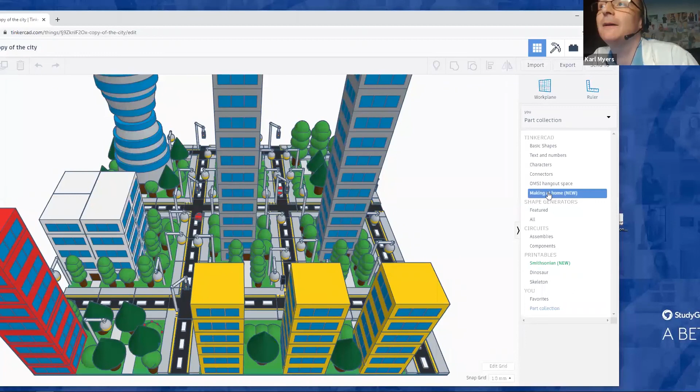With pasta as well, right Professor? What's that, sorry? Pasta - oh yes, the spaghetti challenge. Yeah, I remember when I was at uni, my professor made us build one, then he went on top of it, and if the bridge breaks down, you fail.

Oh, that's it. You spend hours and hours building it, and then you just come along and destroy it. Yes, but that's an ideal example of what will actually happen when you're designing these things. You basically need to test them to destruction using software like this, so you're 100% sure it will not collapse under load.

So if you have a look at my screen now, you'll see a little bit of a cityscape that a student has created just using the basic shapes we've been using - spheres, cones, squares, all the different shapes. It's a really, really nice design, and I was really impressed by it.

It takes me weeks to do something like that. So it's really, really good. Let me just see if I can find these popsicle sticks so you can see. Has anybody else got any questions while I'm doing this? On anything at all?

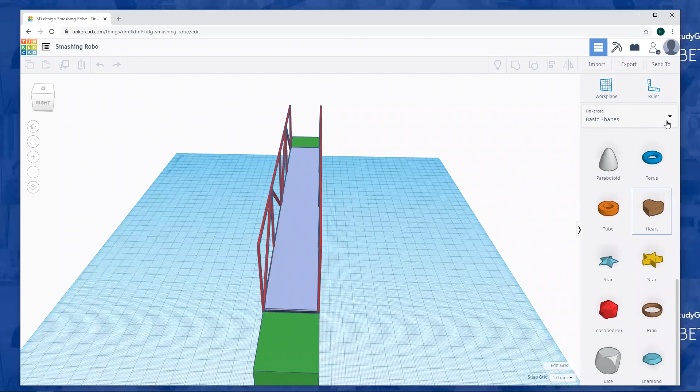For the student asking where to find the popsicle sticks, in the component search bar where it says basic shapes, click the drop down box and you'll see making at home. Click on making at home, and there you go - there's all household objects, so you can actually design something using household objects. If I bring a popsicle stick over to the work plane, you can actually build it just using these, which is a really, really good part of the software.

So I'll just change the orientation of that to 45, and I'll also change it to another 45.

Sorry Karl, can you show it again where they can find those do-it-at-home kind of things? The home, yes, no problem. Yeah, the tissue roll and the popsicle sticks. Yeah, no problem, so if I just go back to the basic shapes again.

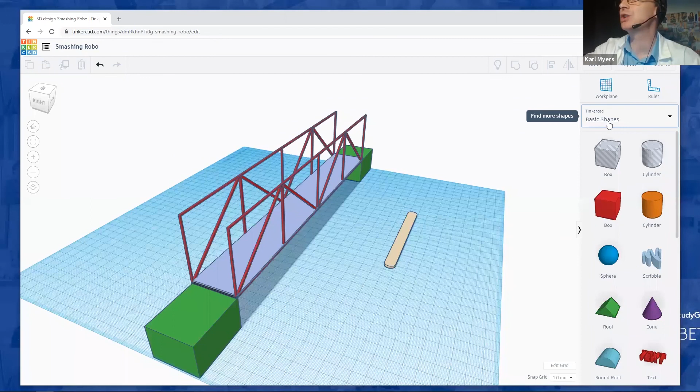If you have a quick look at my screen, you'll see on the right hand side where all your shapes are, there's a text box or drop down box just above the shapes with basic shapes written, or whatever the alternative is in Portuguese. Drop down that box and you'll be faced with different parts collections. You'll see a selection called making at home. Click that, and in the component search bar you've got everything from popsicle sticks, tissue rolls, paper towel rolls, pencils, pennies - everything you've basically got at home. So you can design anything out of household objects in Tinkercad and then build it yourselves at home, which is really, really good.

This is pretty cool, actually. Camila is going to build one, Professor. I'm going to try to do one. Yeah, it's not going to work out, but I will try it for sure.

This software - I've used it many times with students in the UK, and it's absolutely fantastic to use. A lot of you should actually click the classes option, join a class option. I used to set homework for my students using that, and if they were having problems at home with it, I could log in and basically fix it for them in their workspace. It's a really good piece of software.

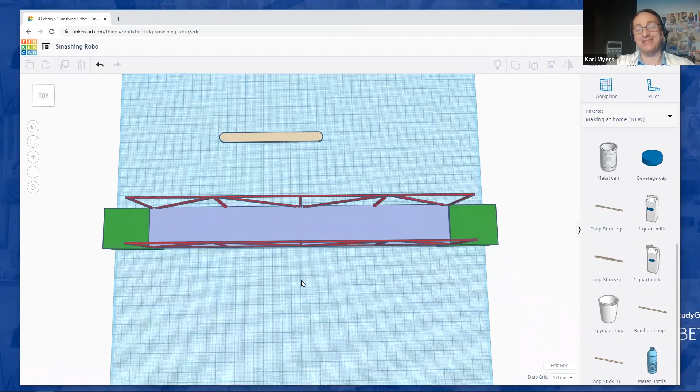So I truly do hope everybody enjoyed that, and I know it's a challenge, but I really do appreciate it's a challenge. Just have a go, just keep tinkering, do what the name suggests, keep tinkering, keep playing with it, and you will get it down. So has anybody got any questions for me?

Teacher, the pasta bridge, is it really possible, or is it just a...?

Yeah, well, you will if you go into civil engineering. If you decide to study civil engineering, you will build a pasta bridge. It won't be a full size bridge, but it will be a bridge to scale, as they call it. So essentially 10 millimeters is 1 meter - that's our scale.

As your teacher just said, you will test it to destruction as well. Someone will come along and either stand on it or put an immense amount of weight on it, and break it just to see how far they can push the bridge before it actually breaks. Have a go at building this one in pasta and see how much weight you can place on the bridge before it collapses.

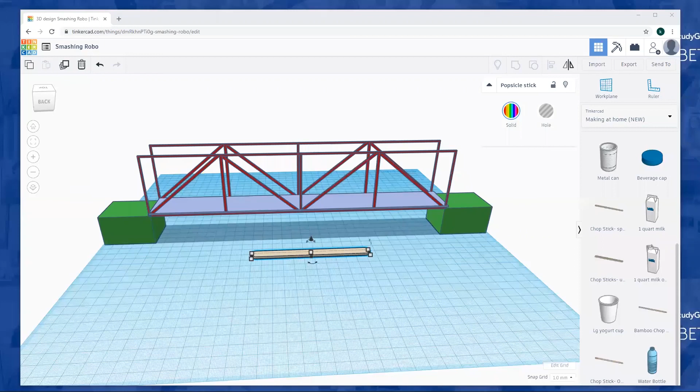E aí, peraí, professor. Sorry, professor, we got one student here, she is very enthusiastic. If we did some diagonal stringers underneath the bridge, making contact with the river bank, would it be stronger? Yes, it would. Yes, it would. And you will find that does actually happen as well.

It all depends on the actual length of it. Also, where we've actually formed the floor beams at the bottom, you will find that will be a truss as well. So you will have diagonal braces across the floor beams too, and that will basically stop the bridge from trying to pull itself apart.

But these are all things that you can experiment with. I've left them out on purpose just so you can experiment with it, and if you do decide to build these out of pasta or popsicle sticks, you can then add these extra things and see how much it actually increases the load capacity of the bridge, or how much weight it can hold. So this is where you can start experimenting yourselves now.